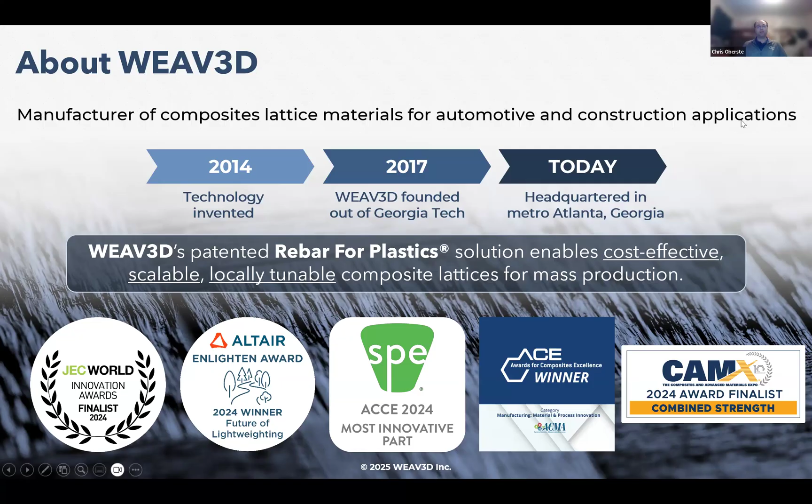So this is kind of where the metamaterial part of this comes in, is these are generally not properties that you would be able to get from conventional metal or plastic or even a natural material. They have some sort of engineered component to them that gives them something a little extra. So these materials are not purely from the constituent material that makes up the actual finished product, but they're actually a function of the meso or microstructure.

So what we're talking about is things in the millimeters to tens of millimeters scale, maybe all the way down to tenths of a millimeter or smaller. You may have seen these in the news in the past, things like negative Poisson's ratio foams, so-called auxetic foams, that actually, when you stretch them, they get bigger in every direction. And when you compress them, they get smaller in every direction. Whereas a conventional material, when you stretch it, it gets narrower in the other direction. And when you compress it, it gets wider.

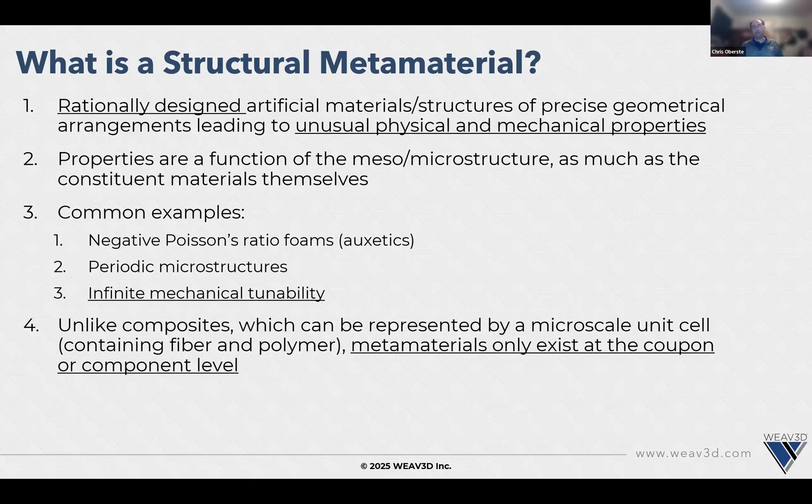So just to give you some foundational background here, what most people would call a normal part design would be something with an isotropic material that is homogeneous: sheet metal, injection molded plastic. You're going to pick your material. You're going to assign thickness to the part. That could be constant thickness like sheet metal, or you can have ribbing like you would in an injection molded part. You then determine, does this pass the load case that it needs to pass?

And then if it doesn't, you decide, is it a small deviation or a big deviation? If it's a small deviation, you maybe just need to play with the thicknesses a little bit more. But if it's a big deviation, now you might need to go to a different material. So I started with polypropylene. Now I need to decide, oh no, it needs to actually be polyamide. Or I started with aluminum, but I need it to be stiffer, so I need to switch it to steel. So this is that standard design loop. You basically have two variables, but you usually pick the material first, and then you play around with the thickness to get the fine tuning.

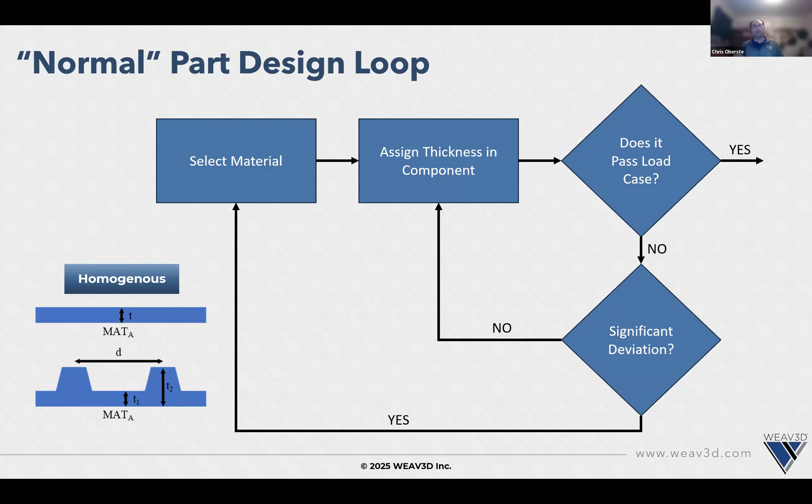When we talk about composites, it's a little bit more complicated. So we have the ply materials. You can have different types of plies in your composite stack up. You could have glass, carbon fiber, Kevlar, what have you. You also will have fiber orientations. So if you're dealing with a unidirectional or even a woven fabric, whether you're laying it down in the 0 direction or plus or minus 30, plus or minus 45, those will all have an effect on the mechanical performance.

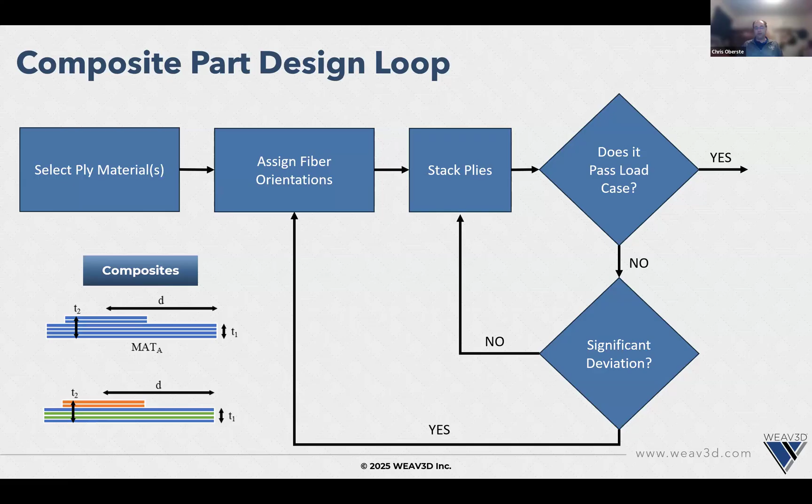And then you're going to have your ply stack. So how many plies do you put in a given location? Do you have a constant thickness over the whole part, or do you have extra reinforcement in certain areas? So those are your three variables in that use case. You see, does it pass the load case? If the deviation is not very significant, you might change your ply stack, or you might actually have to go back and change your fiber orientations completely if it is significant. So this is, again, not super complicated. You can still do this in a linear incremental process. But once you get to metamaterials, it becomes more of a challenge.

So in the metamaterial space, you generally have a bulk material. One of the good examples of metamaterials is injection overmolded composites. You might be familiar with taking a piece of organo sheet, sticking it into an injection molding process, injecting ribs or other structures onto the back of that. That injection molded material is what we would call the bulk. You're going to decide how much bulk you're going to use and where you're going to put it. So this is the thickness and the location.

At the same time, in parallel, you're going to decide what composites you are going to put in this design. Is this going to be a constant thickness laminate? Is it going to be something like what we do, which is lattice structures? You're then going to have to determine the fiber orientations and how much composite you put in each area. So if you have a total part thickness of 3 millimeters, do you do 2 millimeters of composite and 1 millimeter of bulk, or the other way around? And then that resulting stack up of the composite and the bulk will give you your final part thickness and part geometry, and then you'll test the load case.

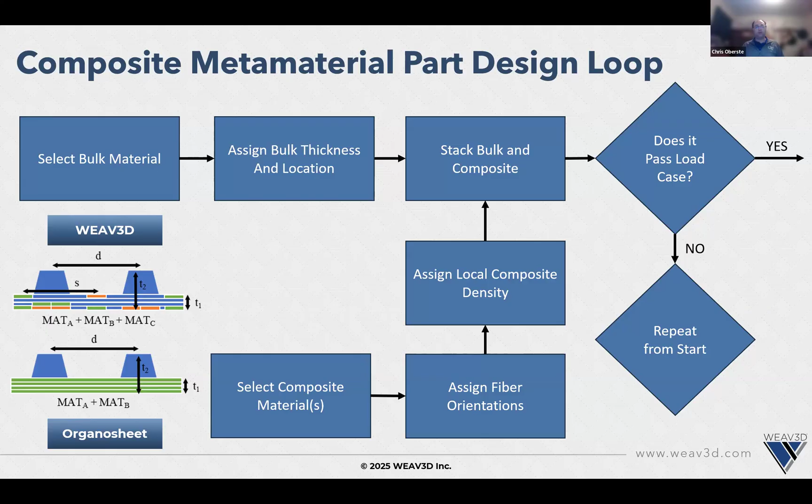The problem is, because you have all these different variables that influence each other, you have to go back to the beginning to redesign this part. You can't just tweak one or two variables very easily because they're very closely coupled. So changing the total amount of bulk thickness in one area also changes the local density of the fibers for the composite portion of the structure. So this is what we mean when we talk about metamaterials: there's a complicated relationship between the material properties, the structure those materials are applied to, and how they are distributed within the geometry you're producing.

Where metamaterials really come into their own is the fact that you can now create really broad structural mechanical relationships. So if I make a metamaterial that consists of polypropylene and glass fiber unidirectional tapes and carbon fiber unidirectional tapes, by combining those different materials, I can tune my properties anywhere from the bulk polypropylene property all the way up to the high performance composite properties and anywhere in between. And I can kind of trade those off depending on, do I want to optimize for cost or weight or what other property? So the idea here is the juice is worth the squeeze. You can do a lot more with a metamaterial than you can with just individual traditional materials.

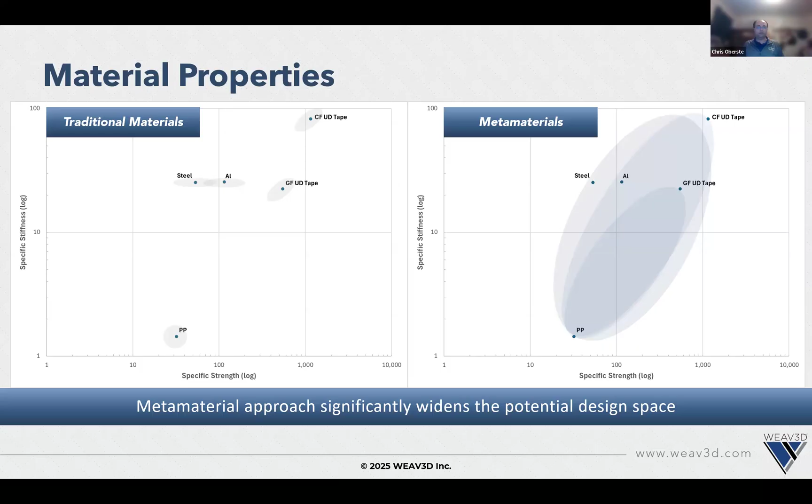So the metamaterial that we're going to be talking about today is the WEAV3D composite lattice. I'm going to use this as an example throughout the rest of the case studies that I'm going to talk through. But I want to point out that you don't have to use a lattice structure like this to produce a metamaterial and get these same properties. You can do this with tape laying. You can even do this with organosheet, though you tend to have a little bit less tunability.

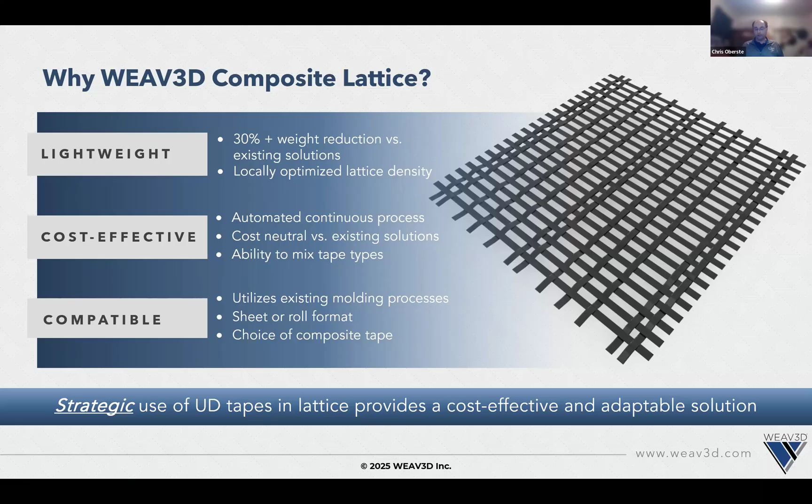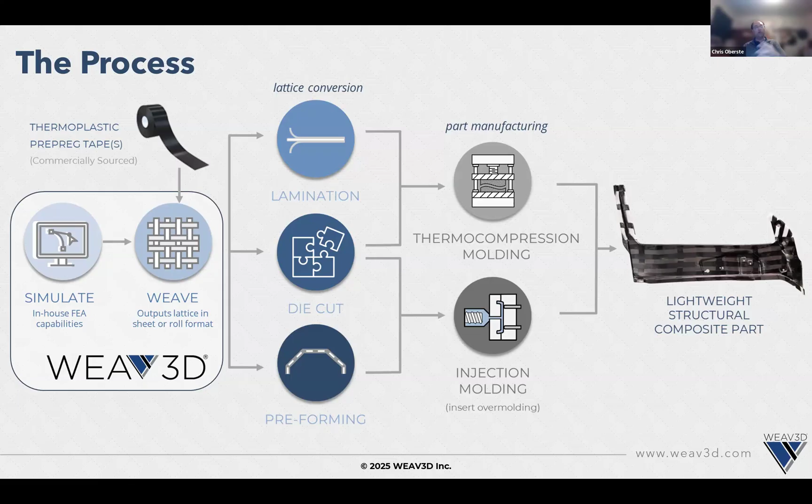But fundamentally, in order to make this commercially viable, you have to be compatible with existing molding processes. So the way this works is we take a tape material, we weave it, convert it into this lattice structure. The lattice goes through one or more conversion steps, and then goes into a part manufacturing process, injection molding or thermocompression molding. And then the resulting product is a hybrid. So it has a bulk material, it has a lattice structure, which is the composite material. And by tuning the different ratios of those materials within the part, you change the properties and you get that metamaterial behavior.

So talking through these case studies, I'm going to present two different ones. The one on the left here is for an automotive beltline stiffener. This is a structural door component. It was originally designed out of carbon fiber PA6 organosheet. Our goal was to redesign this into polypropylene with lattice reinforcement and be able to match the side impact load case and maintain the existing tooling geometry. So we had to use the same part features, the same thickness, all that sort of stuff.

The one on the right, this is a non-structural interior door component. The goal for this one was to start from a 1,700 grams per square meter natural fiber polypropylene non-woven mat and reduce the density of that mat to get weight savings while still complying with certain deflection constraints and again, maintaining the part geometry so they didn't have to change the overall door assembly. So unrelated parts, two different doors, two different vehicles. But what I'm going to show you here is depending on how you combine the same lattice solutions, you can get very different performance outcomes.

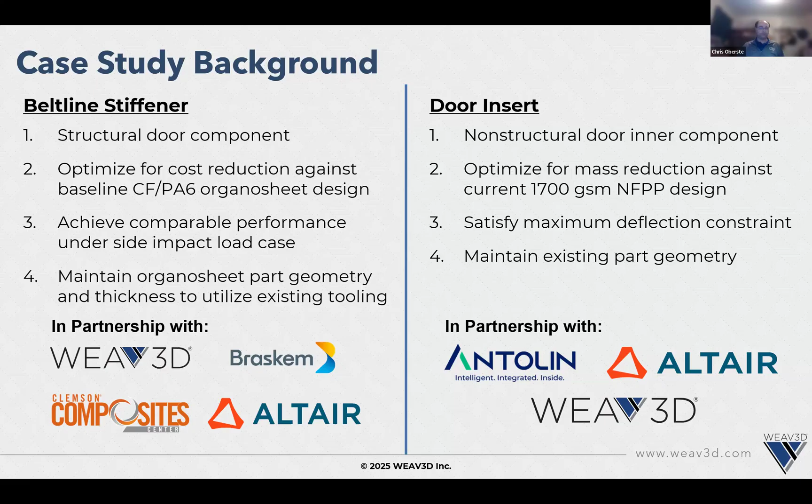So just a couple pictures here. The one on the left is, again, that beltline. That's the thing with the red arrow pointing at it. Similarly, the one on the right with the yellow graphic that has the red arrow pointing at it, that's the door insert. These are both part of larger assemblies. But we're only going to be optimizing the actual component level itself.

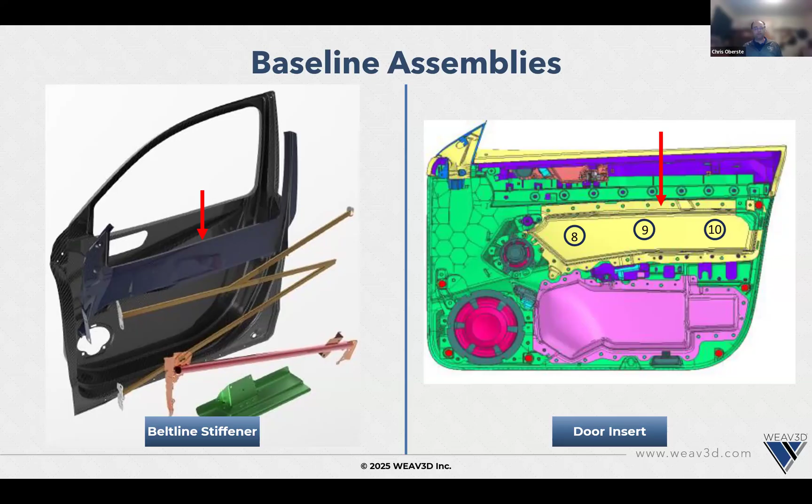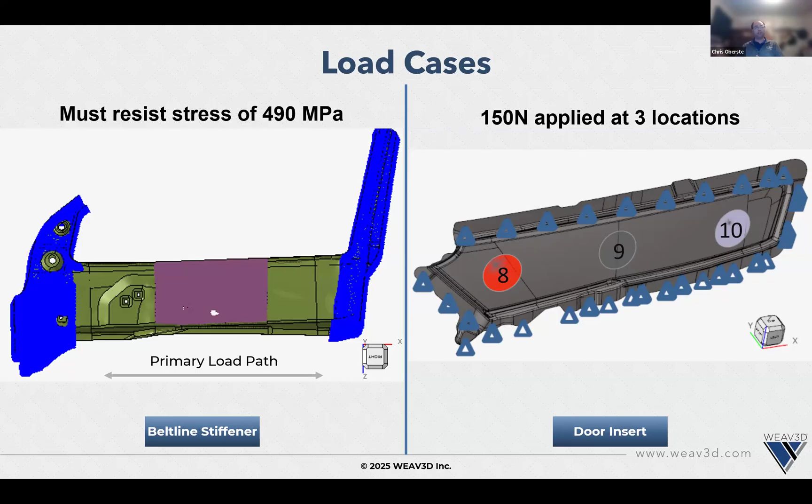So the way we start with all of this is we look at base load cases. So we're going to determine that this beltline is going to be fixed on the left and right A and B pillars. It's going to have a load applied similar to a side crash pole test in the middle of the structure. And the overall design has to be able to withstand about 490 MPa max stress in the cross section of this part. On the right-hand side, it's a little bit different. We're still going to be fixing the perimeter of this part, but we're going to actually apply 150 newtons at 3 distinct locations, and we have to be within a certain deflection limit at each of those locations to make this pass.

So when we do a baseline simulation, this is again using the organo sheet for the beltline stiffener and using that natural fiber nonwoven for the door insert. The baseline lets us understand where are the locations of high and low stress in this part, purely based on where that part's geometry is dictating the stresses will be.

So your beltline stiffener, you can clearly see there's more deflection. That's the bottom image in that mid zone. Very little deflection towards the edges where it's fixed. That makes sense. But the stresses are actually not evenly distributed. So you can see we have some gradient of stress up and down. That's the top image. But again, because we're fixing the A and B pillar, there's no stresses in those locations. So we don't need to carry that much load.

On the door insert, that one is actually going to have those 3 distinct loads applied. So they have 3 distinct spots that need to be able to withstand stress and limit the deflection. So we're looking at both how much stress there is and then how much deflection is induced in this part.

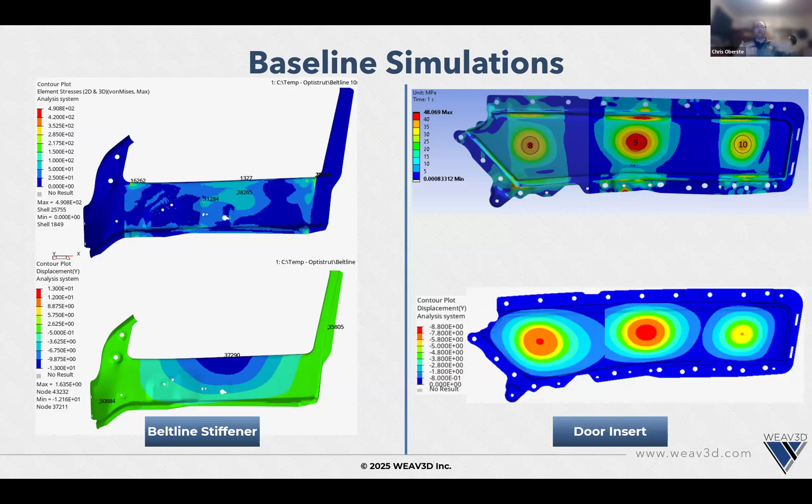So flipping briefly over to the beltline stiffener itself, we ended up going through a number of design iterations here. We came up with 2 different designs that actually have the same amount of glass and carbon fiber in them, but that glass and carbon fiber is structured differently. So in the design 7 that you see on the left, the lattice is produced with a striping effect of glass and carbon fiber above and below each other.

And you can actually see this in that graphic that I've put on the right here with the lamination image. So you can see there's 2 different colors of black. The more matte black color is the carbon fiber reinforced tape, and the darker black color is the glass fiber reinforced tape with a black polypropylene.

And you can see that we've actually tailored this lattice so that we have a lot of material in the middle. And you can see that in this bottom image where I've laid one of the trimmed parts over an untrimmed piece. You can see where the high density region aligns with that middle region of the trimmed part right here. And then towards the edges where we're either going to trim material off or where it's only going to be the A or B pillar, we've decreased the density in order to get our cost optimization to where we want it to be.

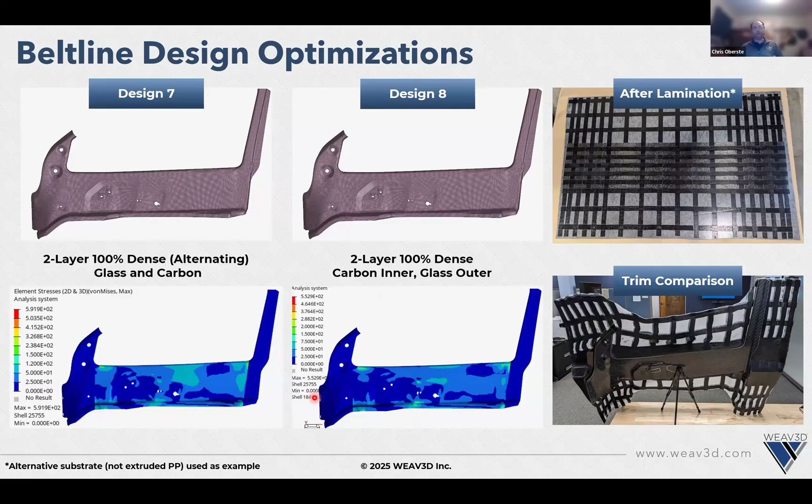But even if you look at these 2 different designs, alternating stripes versus stacked stripes, so this is carbon fiber on the inside, then a layer of glass on the outside, the stress distributions on these 2 parts are very different. And this is because where you put the reinforcement in these metamaterials is as important as what reinforcement you put in them.

So talking about the actual metamaterial properties. So if I start on the beltline stiffener, the original baseline material is a homogeneous organo sheet. It is anisotropic. It has different properties, whether you're on the 0/90 or you're on the plus or minus 45s. However, those properties are the same throughout the material. You're not putting a different type of material in different locations. So it has a flex modulus of about 39 and a density of about 1.58.

When we go to the low density lattice, where we had the wide spacing between the tapes, we're only getting a modulus of about 9.6, and we're only using glass and polypropylene to do that.

This is also a 2-sided design, so the lattice is on both top and bottom of that sheet that you saw. But the density is really low. It's about 1.19. And then when we go to a hybrid glass and carbon fiber 2-sided, we now are back up at 39. So the idea being that in the area where we need the performance, we are directly matching the original organo sheet. But in the areas where we don't need the performance, we can reduce that density, save cost, save weight. And even then, we're still at 1.26 despite matching the original organo sheet.

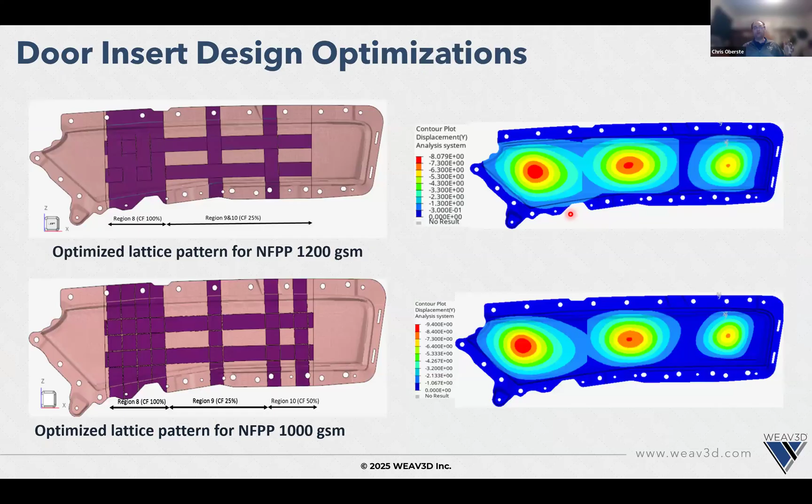And then on the door insert application, we started with the 1700 GSM version, going to 1200 GSM with lattice. We saved about 15% on weight, and going to the 1000 GSM with lattice, we saved about 25% on weight. And then I like to point out this one just so people can understand why you want this kind of unusual, non-symmetrical pattern on this structure. Well, if you were to just apply an evenly spaced lattice reinforcement over the entire surface, your cost factor would be about double what we're able to achieve with just putting the lattice in the particular locations where it's supposed to be. So this is really a very cost-effective approach to applying these materials, and it's leveraging that metamaterial property.

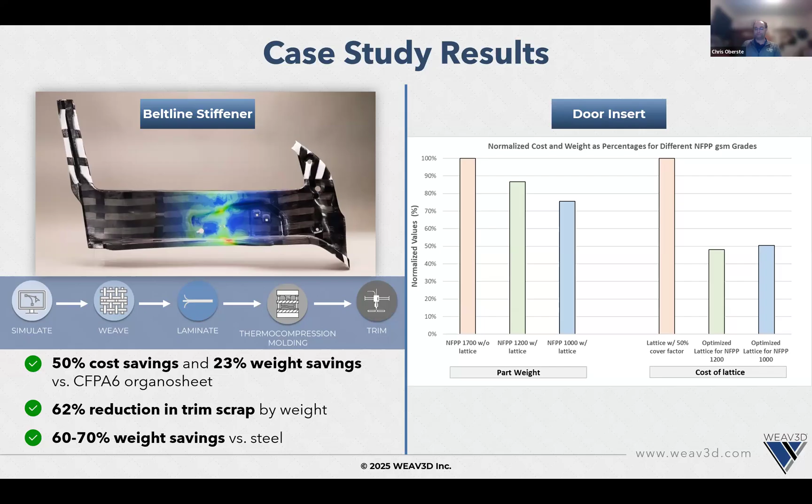Hmm. Okay. And anybody in the audience, feel free to chip in and ask a question here.

But what's the risk in injection molding of distortion? How do you fixture the lattice in the mold such that it doesn't get moved out of the desired position? That's a great question. So that is one of the key challenges when you're looking at injection molding versus compression molding. Compression molding is much simpler in that regard because you oftentimes have a carrier material and you're not flowing as much when you're actually compressing that part. With injection molding, it partly comes down to how you gate the part. So edge gating is going to be more aggressive than center gating or other types of through thickness injection.

But usually we are relying on tooling features in the tool to pin or tension the lattice during the forming process. This is also one of those things where in certain geometries, if there's not a lot of complexity, you might actually prefer not to heat the lattice in order to keep it more intact during the injection process. Because of how thin these lattices are, the injection molding step actually very quickly heats up the polymer on the surface. So you don't really have to get the lattice hot in order to get good adhesion, but you're more doing that to get it to drape or conform to the tool if you need a complex shape to be produced.

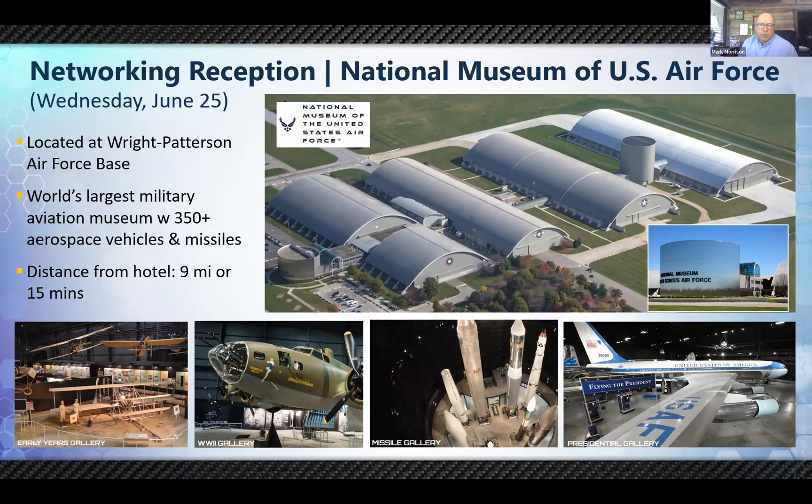And then one of the premier things that the members meetings have come to be known for is the networking event, normally on that Wednesday night. So we're pleased to share that we secured the National Museum of the U.S. Air Force. It's not only huge, but it's full of really cool and neat things that I think you're going to really enjoy. You see some of the images here, but we're very, very pleased that we're going to be able to offer this. Not only a great venue, but it allows more networking engagement for our members in a relaxed setting.